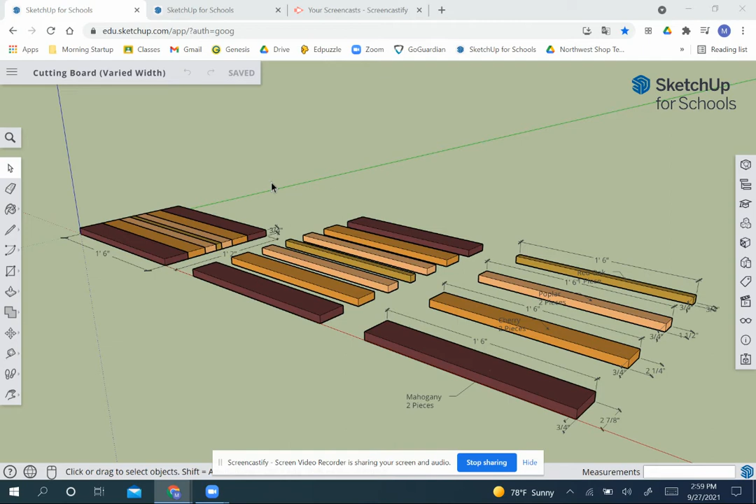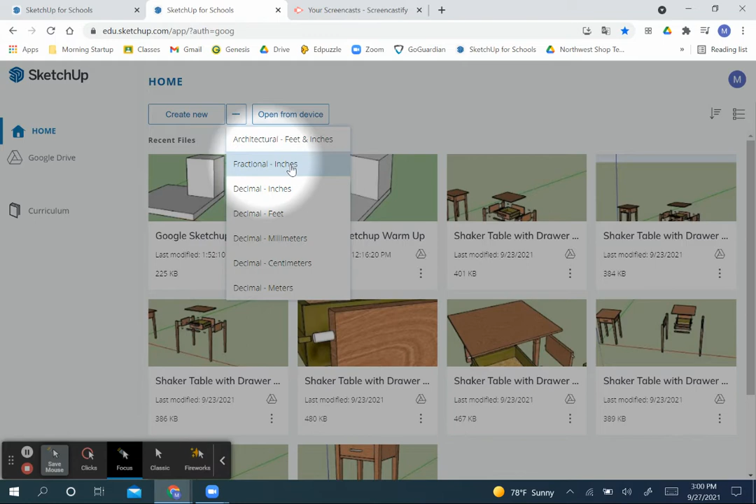Let's get started. We're going to go to the home page and focus the cursor. We'll start by going where it says create new and go to fractional inches, give it a second and it'll load your home page. You have our lady over here that you can leave or click and delete, whichever you decide. We're going to leave her here for now, just to give you an idea of scale when you start drawing.

First thing I want you to do is save your work where it says untitled. Go ahead and click, choose a folder in your drive. I'm going to go to my folder and name it Mr. Friedman Cutting Board. You can name it the same thing but with your name here - make sure you put your name and not Mr. Friedman. Then I'm going to hit save, and you should see your file name on the top left corner here.

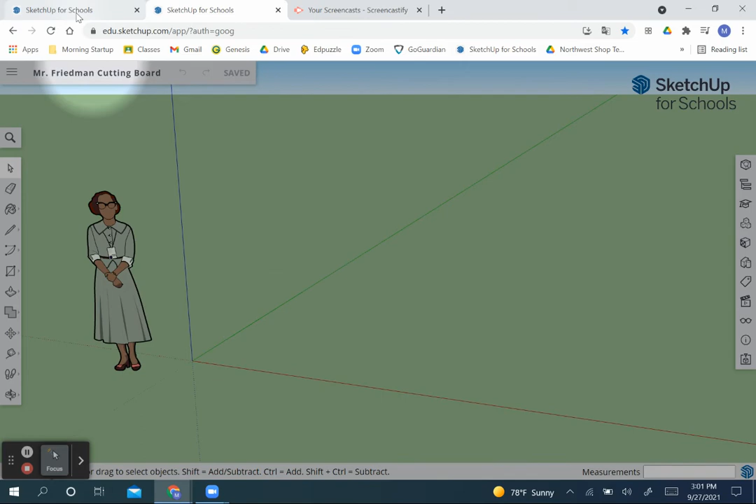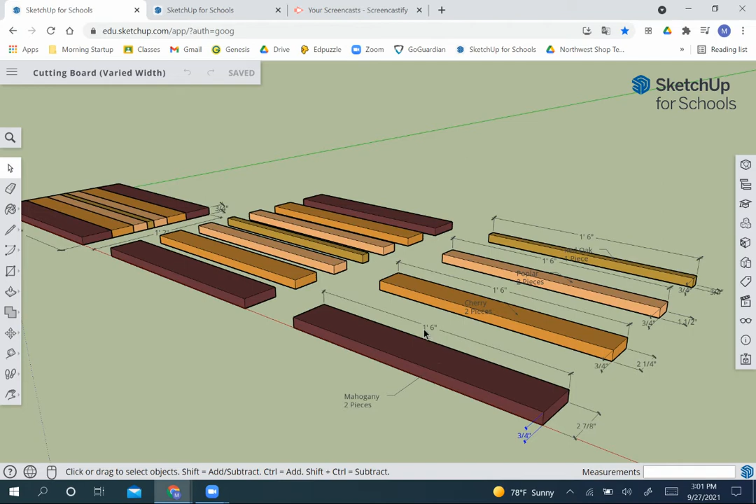Now we're going to get started, and I'll keep referencing this so you have an idea of what we're drawing first. We are going to start with drawing these individual pieces first, then copy and paste them over here and over here for our finished project. So we're going to start by drawing mahogany pieces, which are 3/4 of an inch thick, 2 7/8 wide, and 18 inches long. Let's get into it.

We're going to do R for rectangle. We're going to click, drag, and click, then do 2 space 7/8, comma 18 - you can see that down here. Now we want to make sure when we hit enter that it's going the right way. I'm going to hit enter - and of course it's going the wrong way, so I'm going to undo that and try again. If this happens, just hit the control key on your keyboard, it'll toggle between those two.

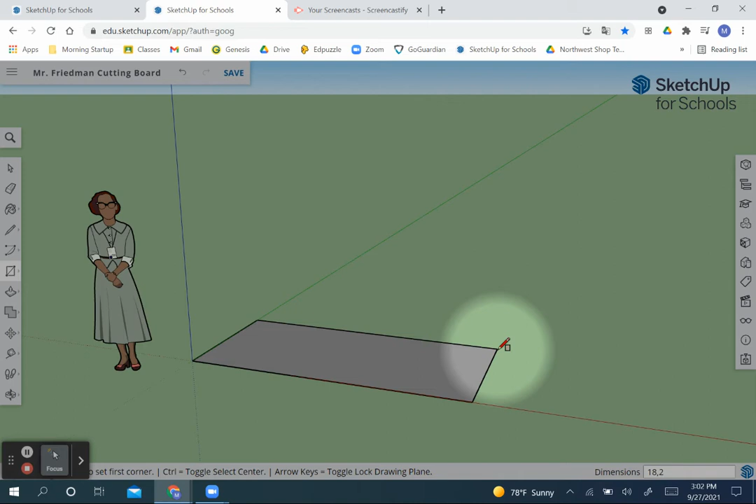Click, drag, click, and I'm going to do 18, comma, 2 space 7/8. See that down here, and I'm going to hit enter. Now we have it going in the direction that I want. So we're going to zoom into that - and so we did rectangle.

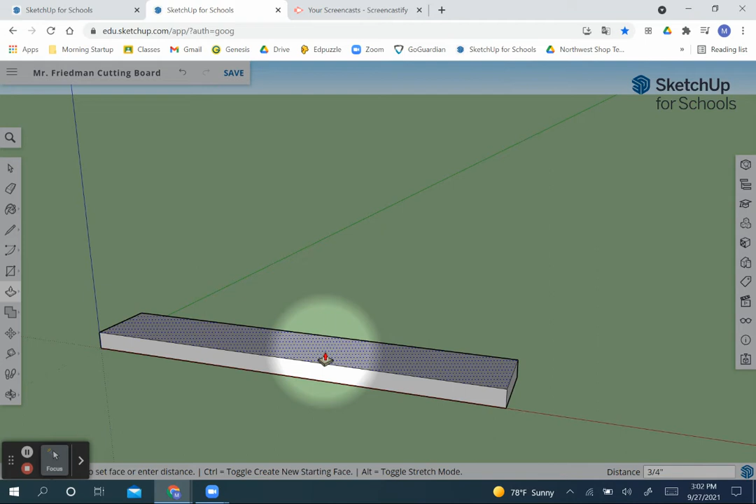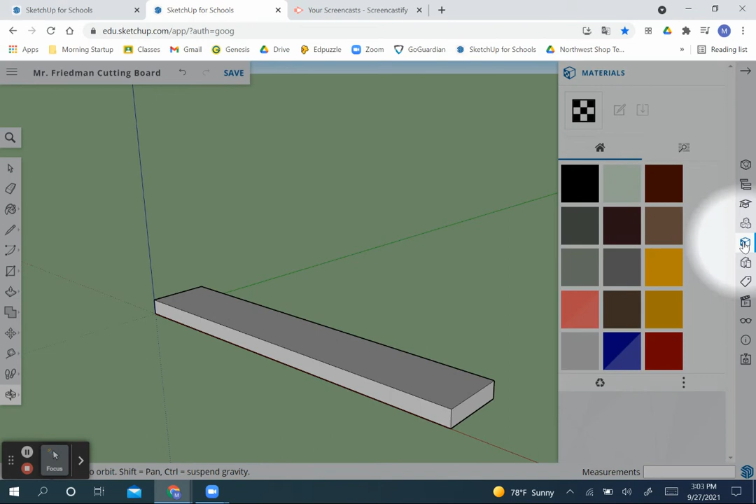Now we're going to do push, click, drag, click, and I'm going to do 3/4, enter - so it's 3/4 thick. Now I'm going to hit the space bar to go to my arrow key, and triple click, right click, make it a group. Then I'm going to color it in by coming over here to this key, and go to this color right here and color that in. So now we have our mahogany drawn.

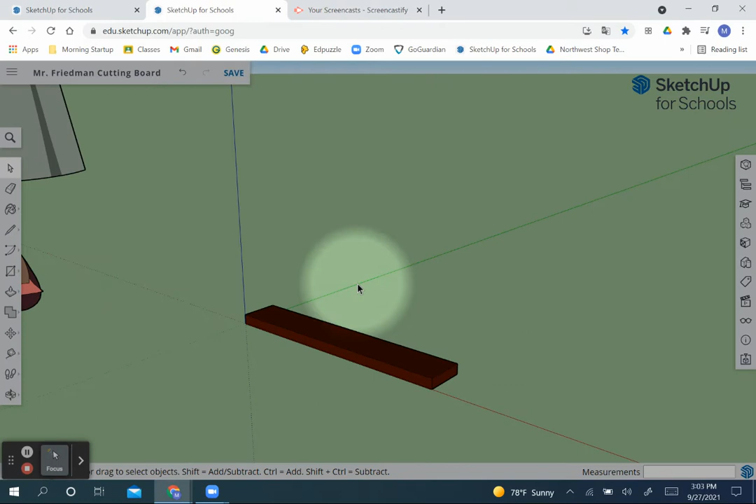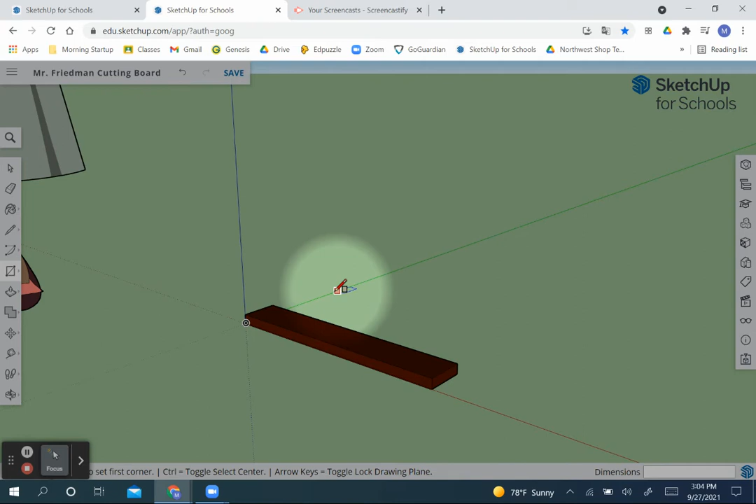Next we're going to do our cherry. Our cherry is 3/4 by 2 1/4 by 18. So now we're going to do our rectangle tool. What you want to do to keep it all lined up is drag your cursor - don't click at all, just drag it to the corner until it snaps there. Then if you bring your cursor out, you see that little dot stays on the green line. So we're going to click, drag, click - this time we know to do 18 first: 18, comma, 2 space 1/4. 18 by 2 1/4, and then I hit enter.

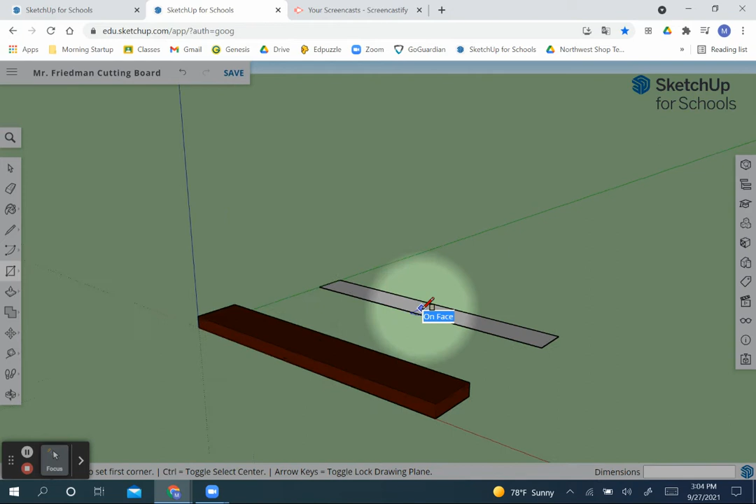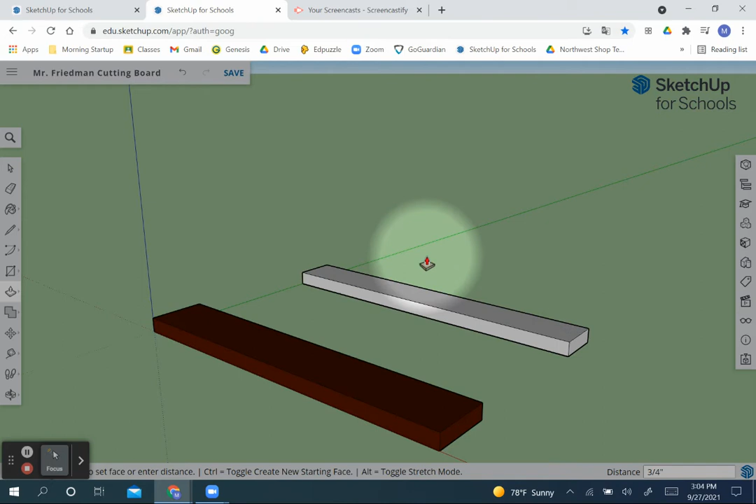Now I'm going to hit the space bar and go to my push tool with the P command on the keyboard. Click, drag, click - and you can also, if you don't want to do 3/4, type 0.75, that'll do the same thing. Enter. So there is my cherry piece, and I'm going to triple click, make it a group. I'm going to move this a little closer with my move key, M on the keyboard - just moving it down. You don't have to do this, I'm just spacing everything out on the screen.

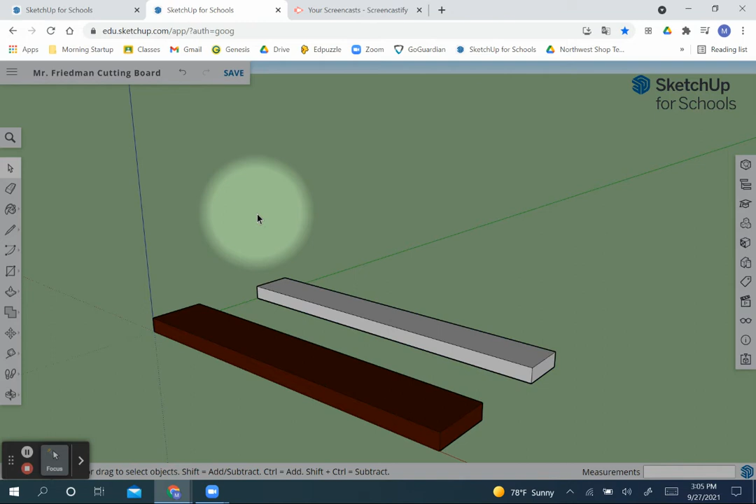Now I'm going to put the color in for the cherry, which is kind of this color here. I'm going to try and find that - looks probably over here, no, so we're going to stay over here. Something like this for our cherry.

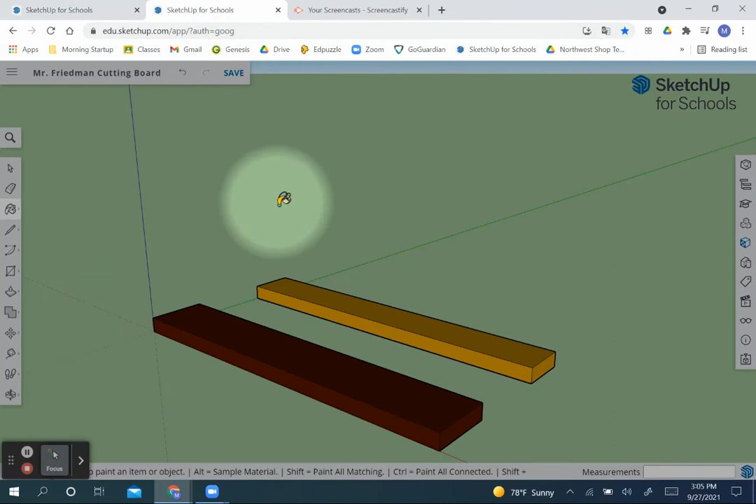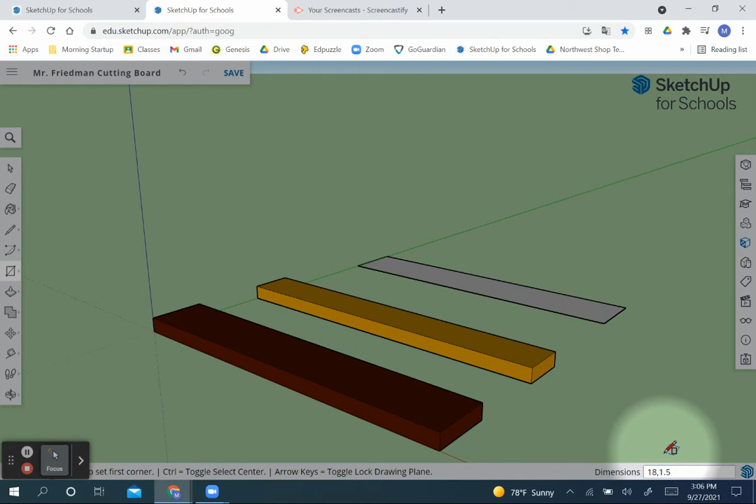Okay, now we're going to move on to drawing the poplar pieces, which are 3/4 thick, 1.5 inches wide, 18 inches long. So I'm going to do my rectangle tool, snap to the corner - don't click anything, just drag it there. Then when you bring your tool out, it's going to lock onto the green axis. I'm going to click, drag, click: 18, comma, 1.5 - if you want to do it in decimal, that's the same as 1 space 1/2. And I'm going to hit enter.

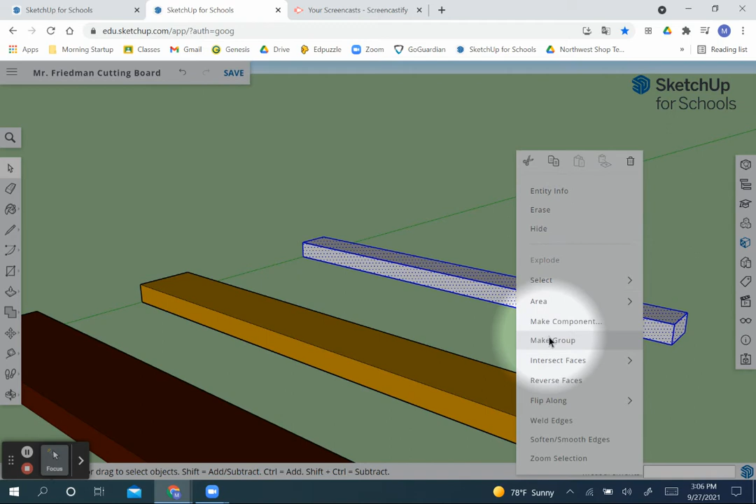Now I'm going to press the P key for push. I'm going to push this, click, drag, click, and then type 0.75, enter. Spacebar to get my arrow key, triple click, right click, make it a group. Okay, so that's my poplar.

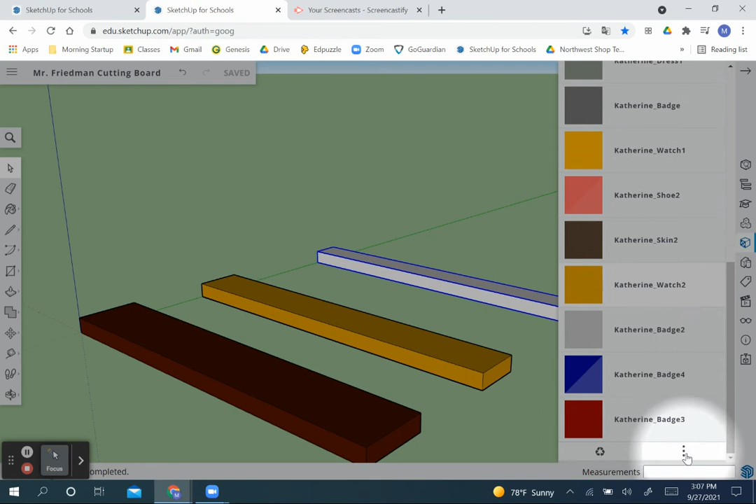Now I'm going to put the color for poplar, which is this color here. We're going to try and find that. Color's looking a little different. So not finding details. Not finding that color. If you can't find that color, you can just do something different, just so we know that it's a different piece. I'm going to go with this one here. Maybe not, I'm going to go that one. Okay, so that's our poplar.

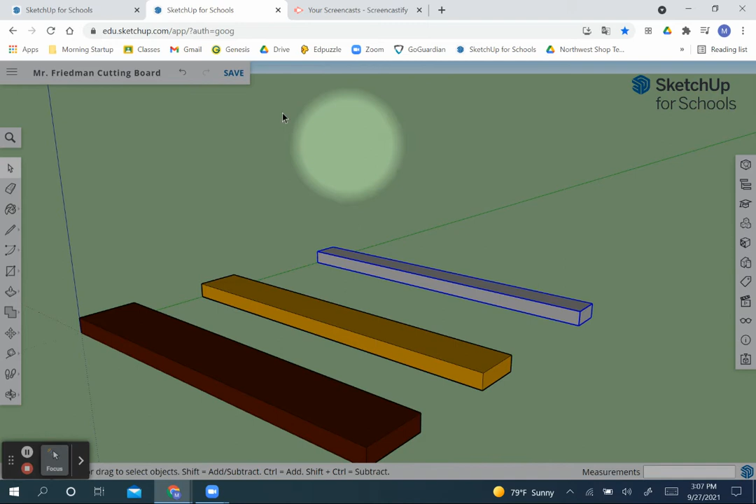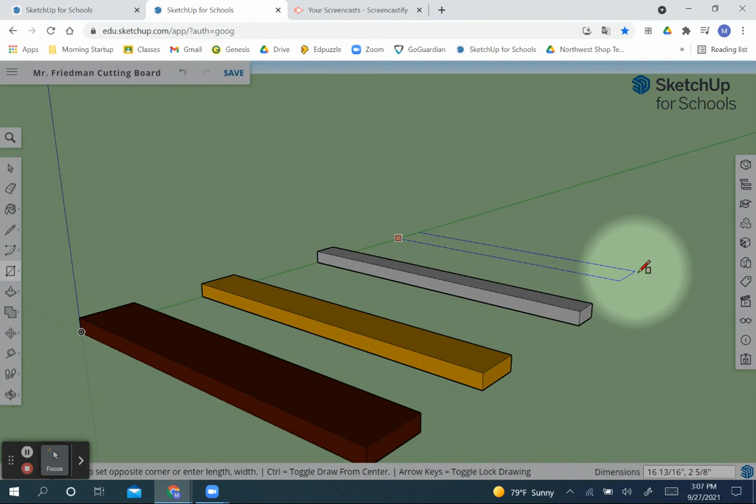And then last but not least, we're going to make our piece of oak, which is 3/4 thick, 3/4 wide, 18 inches long. So one more time: rectangle tool, snap to your corner, slide your cursor down and keep that cursor on the green axis. Click, drag, click, 18, comma, 0.75, enter. I'm going to zoom in a little bit here.

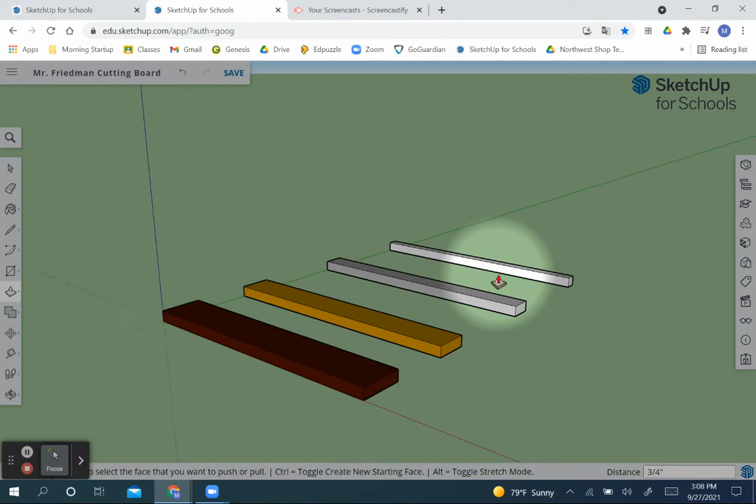I'm going to get my push tool, click, drag, click, 0.75, enter. Okay, and now I'm going to group this. So I'm going to hit the spacebar, triple click, right click, make it a group. And we're going to color this one in. We're going to go with this one here.

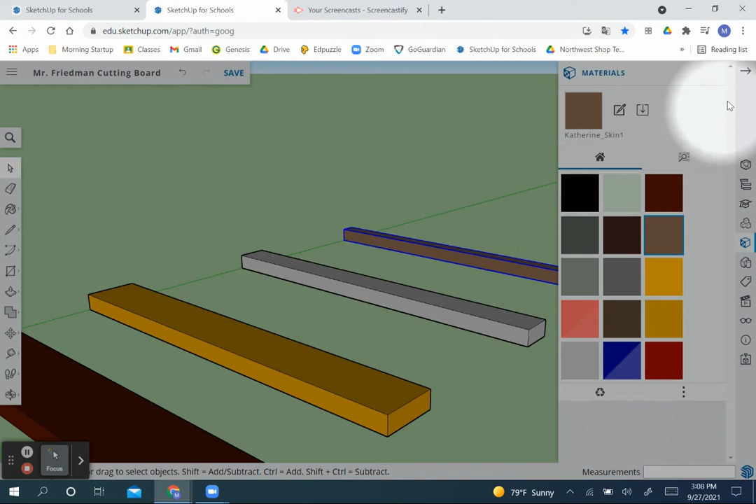Okay, so now we have all of our pieces made. So for the first section here, we're going to learn how to dimension and label them, and we're going to move them around as well. Okay, so first thing we're going to do is put some dimension lines on. Actually, no, we're going to move these over and copy them to do the second section here. We'll dimension them last.

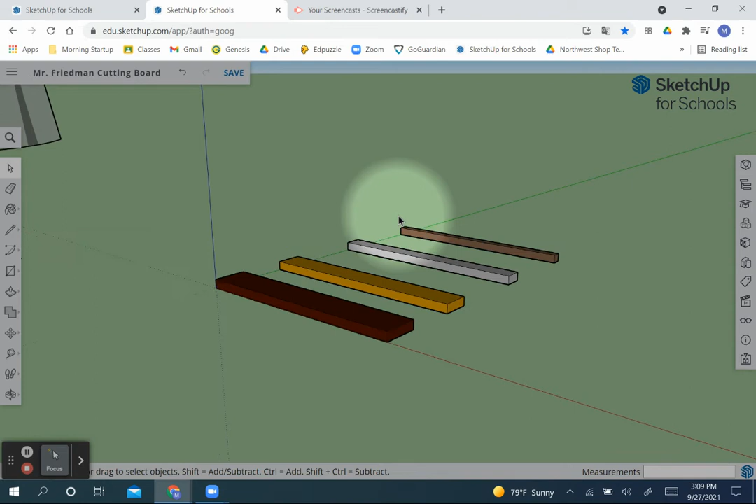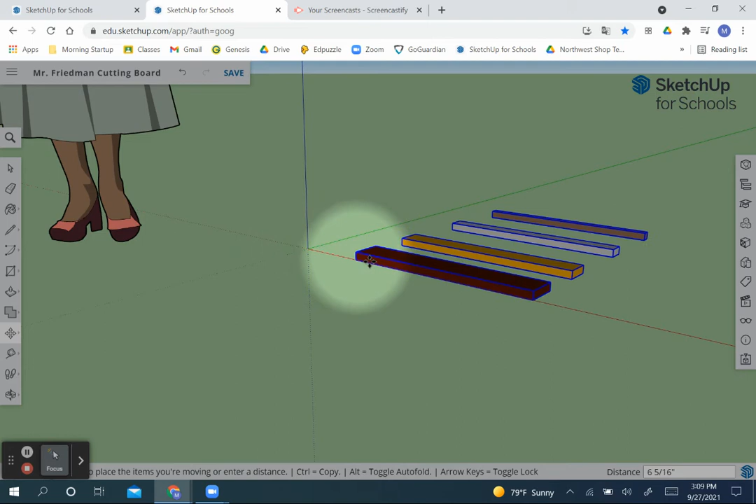So, spacebar, I'm going to click outside of here. So what I want to do is move these out of the way right now. So I'm going to start with my cursor over here, and I'm going to click and hold and drag a box across so that I can select all of these. And now I'm going to press M for move, and I'm going to click a corner once, and I'm just going to drag it, zoom out a little bit. I'm going to drag it all the way over here and click again to keep it in place. Move my camera over. Okay.

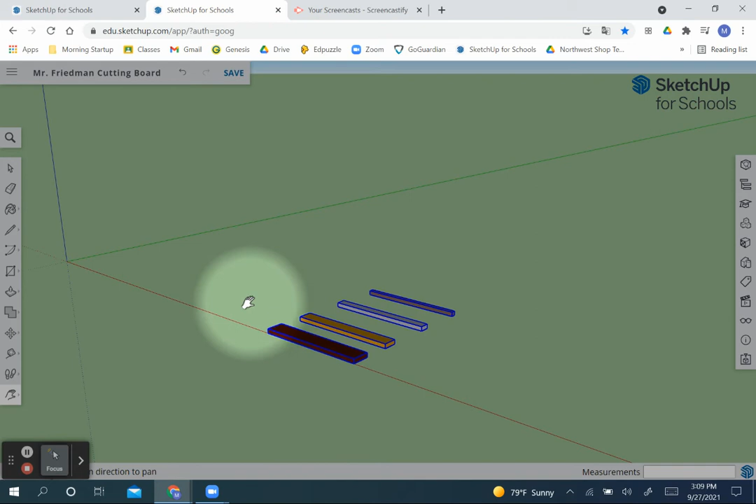Now, what I want to do next is start copying some of these pieces over to here, to this area right here, so that I can make my exploded view. Okay, so here's how we're going to do it.

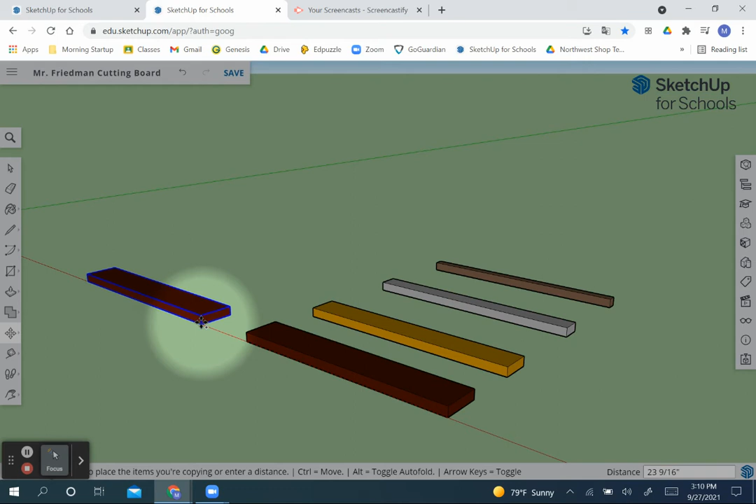We are going to start by unclicking all of them. And what I want to do is just move this one piece over. So I'm going to press M, click the corner once, and you can see when I start moving it, it's moving that one piece. But I want to copy it. So what you can do while you're in this mode is press Control once on your keyboard, and you should see a little plus sign go next to the arrows there. And you notice it made a duplicate of this piece. So I'm going to move it somewhere right around here, and I'm going to left click. Now we have a copy.

Okay, now just to go back to our sample: we have one mahogany, one cherry, one poplar, one red oak, and then it goes poplar, cherry, mahogany. So next we're going to do our cherry, then our poplar, then our red oak.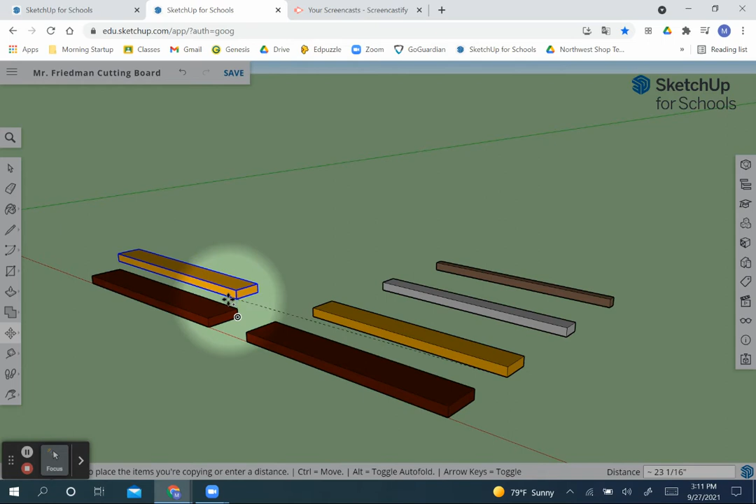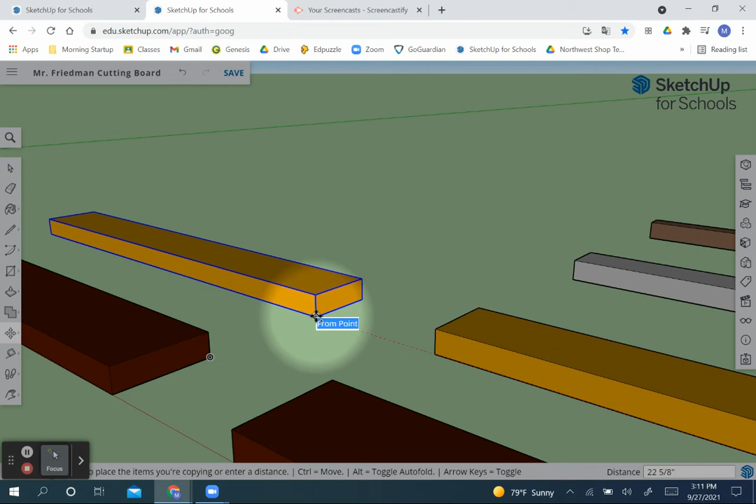So we're going to move again. I'm going to click this corner here, and it's moving that one, so I'm going to hit Control. And now what I want to do here is I want to line it up to this piece also. I want it to be lined up in the same spot as this. So as you're moving it over, you should see a red line. You want to keep it on the red axis, and we want it to snap to this corner. So if I move it near here, it's going to snap to the end point in group, is what it's going to say. So once I have it snapped to there, I can drag it back over until it snaps to both — right there, you can see both of the dotted lines are highlighted. Now I'm going to left click. Okay, so I have that moved over.

And so now I want to move a piece of poplar over, the next smallest piece. So I'm going to pan over to here. I'm going to get my move tool, click, drag — and it's moving the same one, so I'm going to hit Control so that it duplicates it. So I'm going to move it down. I'm going to move it over here until it snaps, and then drag it until both of them snap, and click.

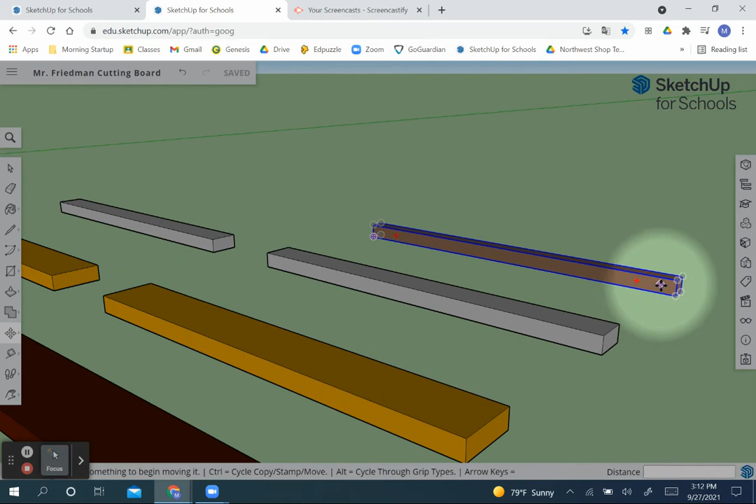Now I'm going to do the smallest piece, our piece of oak. Click, drag, hit Control so it copies, snap, move it over till they both snap. Okay, and now I have both of them copied over.

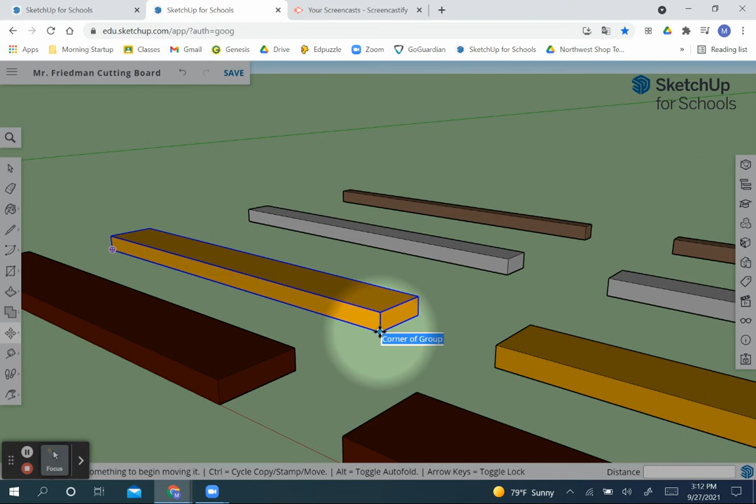Since these are spaced out really far apart right now, I want to move them a little closer. So first I'm going to move them all together like this. And just to make our lives easier, now we're going to do the reverse pattern, put these all in place, and then space them apart again.

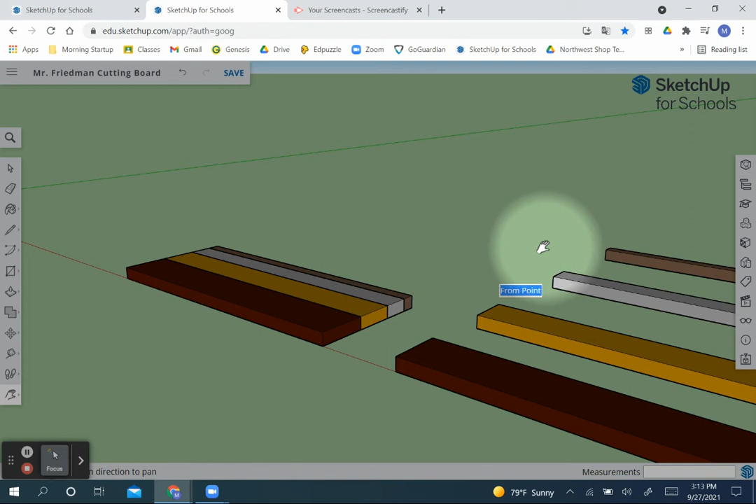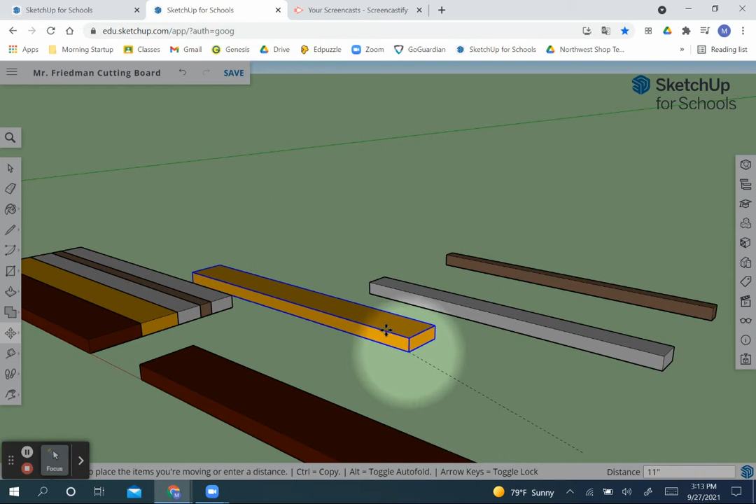So I'm going to take a piece of poplar and move that over, copy it with Control. It's going to go over here, and then we're going to take our cherry, move that over, Control to copy, move that over here. Last but not least, we're going to finish off with our piece of mahogany. Click, drag, Control to copy, and click it into place there.

So now we've made the copy, and we have our cutting board, but this needs to be an exploded view. So what we want to do is move all of these and separate them again, and I want them to be 2 inches apart each. Here's how we're going to do that.

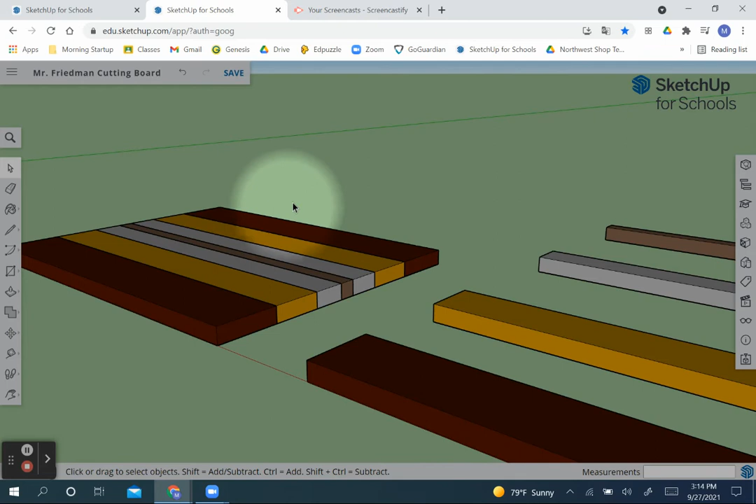I'm going to hit the space bar to get back to my cursor and unselect anything that you had selected. I want to only highlight and select this piece, this, this, and this. I can click out here and drag until the box only goes to right here, not over to here. So just those are highlighted right now.

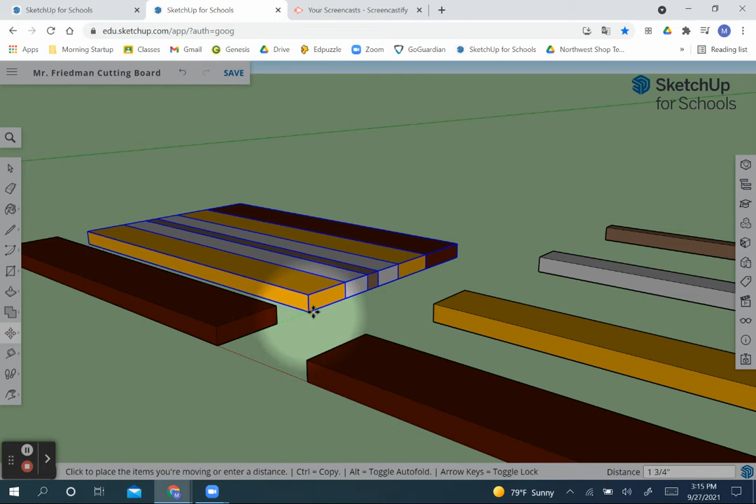Now I'm going to hit M for move. I'm going to go to this corner here, and click, drag so that you see the green axis. Click, drag, click, and then I'm going to type 2 and enter. Okay, so now they're 2 inches apart.

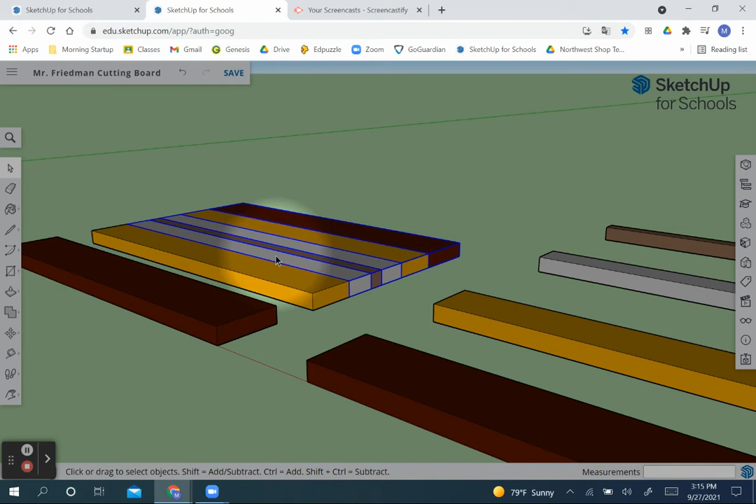Spacebar, click so that they're not all highlighted, and then I'm going to highlight just up until this one here. M for move, click, drag, click, 2 inches, enter, and we're going to repeat the process for all of them. So I'll click outside here, click, drag, click. Now that you see the pattern, I'm going to move a little faster.

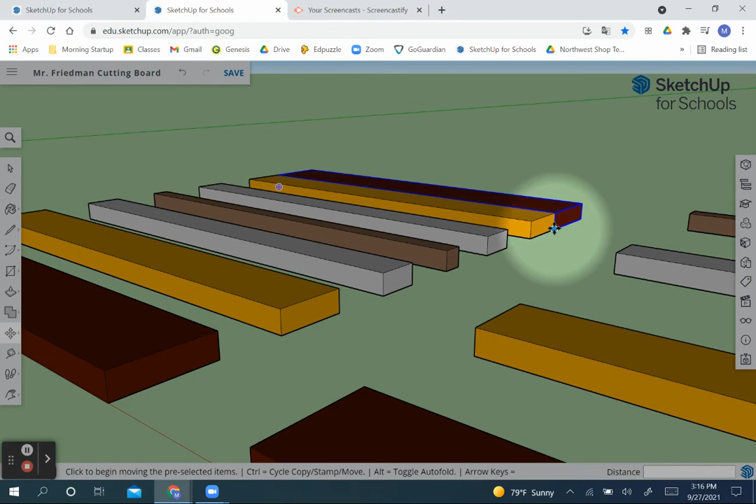This is going to make it so they're all spaced out equally. Click, drag, click, 2 inches. We just have a few more left to do. Click, drag, click, 2 inches. Last but not least, select just this one, and click, drag, click, 2 inches.

So then we end up with all of the pieces equally spaced, like so. Now, what we want to do at this point is make our actual cutting board. If we go back over to here, we want to make our cutting board over here in this corner.

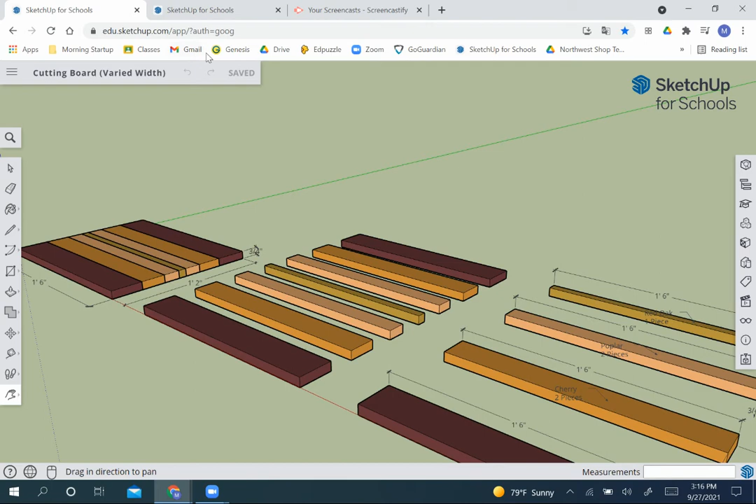So what we're going to do is copy these pieces over and then just put those back together. We're going to highlight all of these pieces. I'm going to zoom out a little bit and reposition my camera, my view. And I'm going to hit M for move.

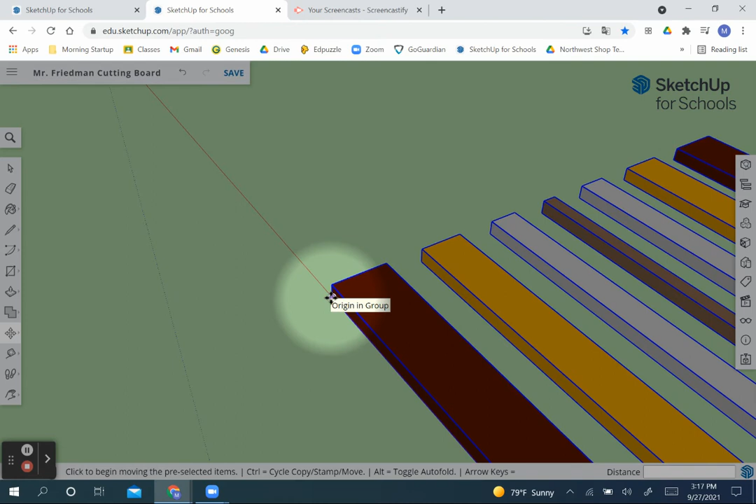And I want to find this corner right here. And I'm going to click. As I drag, it's moving that object. So I want to copy them all. I'm going to hit Control. Now I have a copy of all of those.

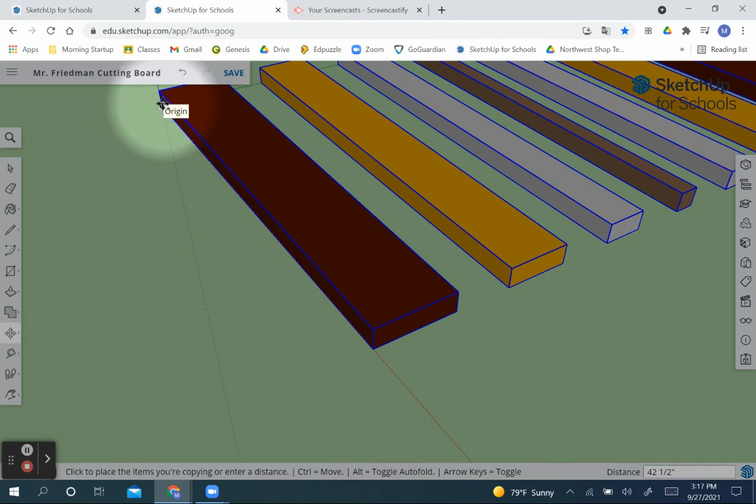And I want to take this to the corner where the red, green, and blue axes meet. So I'm going to go to that corner and click it in place. Let me reposition my camera like so. Okay, so you should have that copied over to here, like that.

And now we're going to put these back together. So it'll just be a matter of doing what we just did before, highlighting all of these, moving them back in place, kind of the reverse of what we just did. So highlight each one, use your move tool, and we're just putting the pieces back together. This is how we're going to glue them up, right in this order.

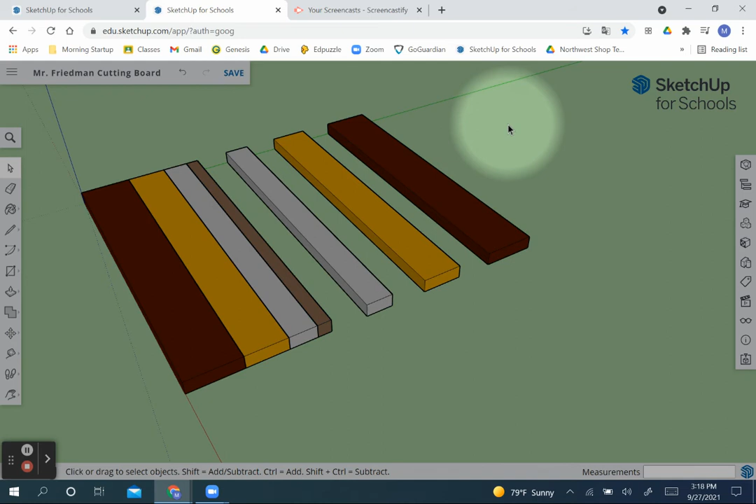Highlight, highlight each one, use your move key until everything is put back together. Okay.

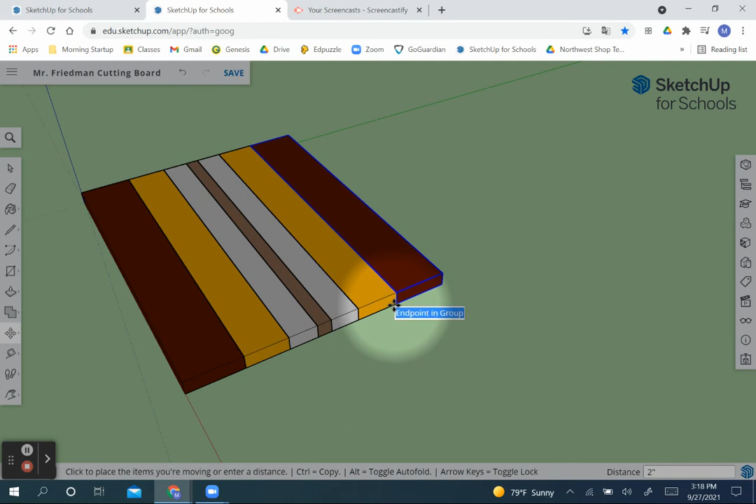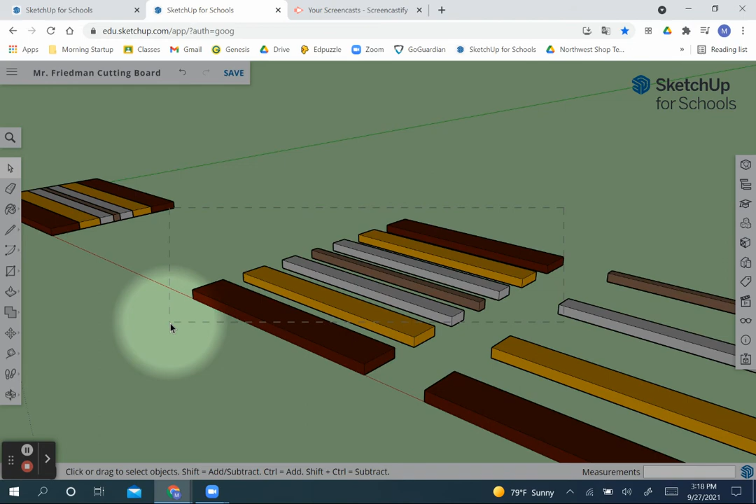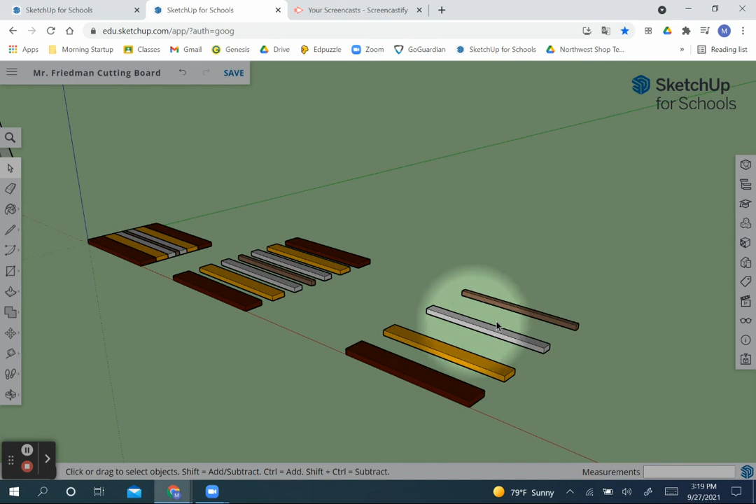All right, so there is our finished cutting board. Now we're just going to tidy some of this up a little bit. Here's how we're going to do that. We're going to move these pieces over just a little bit closer. I'm going to highlight all of this. Whoops, didn't want to highlight that—let me come back over here and make sure I'm only capturing the pieces. I'm just going to move that a little bit closer, like that. And we're going to do the same for these, move them a little bit closer, like that. Now everything's nice and neat.

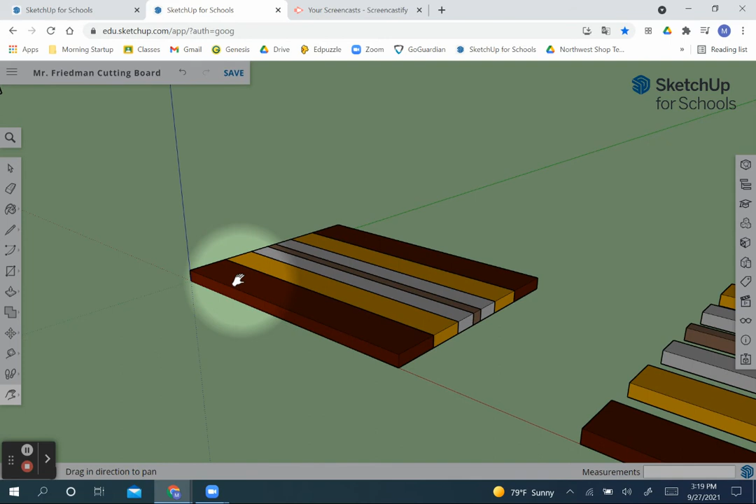So the last thing we're going to do is dimension and label everything. We'll start with our main cutting board. The way we do the dimensioning is over here on the left side where the tape measure is—click that, then go to this icon here, that's for dimensions, and you see the little tape measure appear. We're going to do our thickness out here. The way you do that is click, let go, drag, click to the top, and then once you click the second time...

Click, drag, click. Sorry, let's start over—I'm going to hit escape, undo that, let's try this again. So click, drag, click, and then drag your cursor out either direction. We're going to go this way, so it shows 3/4.

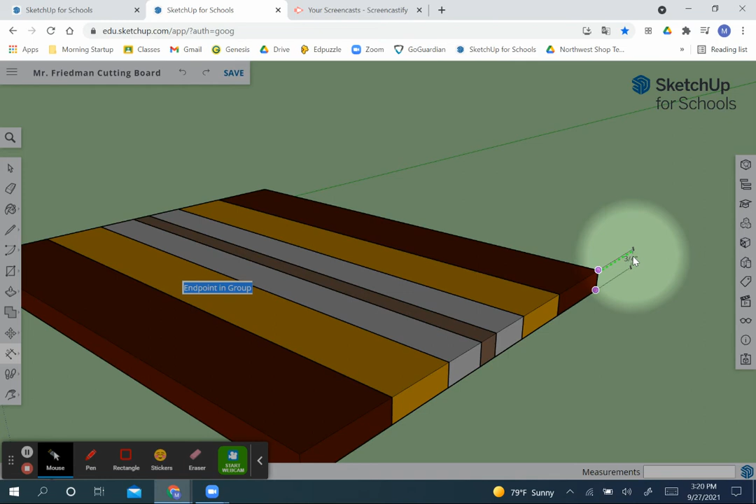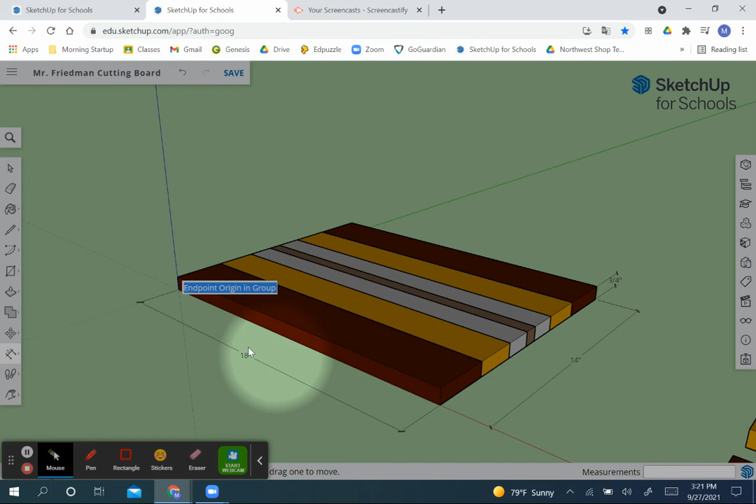Okay, that's our thickness. Now we're going to do our width: click, drag, click, drag it out, and we have 14 inches, which is what we want. Then click, drag, click—whoops, hang on, do it that way. Click, drag, click, and then I'm going to bring it out like this. So I have 18 long, 14 wide, 3/4 thick. That's the overall size of the cutting board.

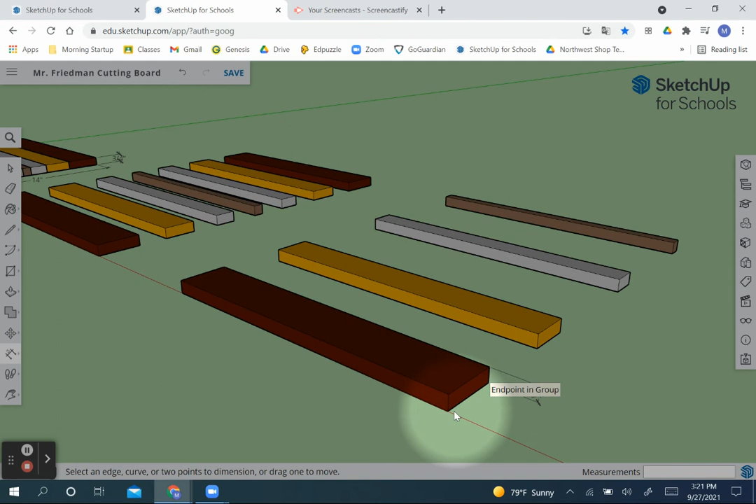We're going to leave our exploded view alone, and then pan over to each individual piece here to dimension those. I'm going to go back to my tape measure, go to the dimension tool, get this out of here, and we're going to click, drag, click, and extend that out this way. That's our thickness. Click, drag, click, bring that out this way for our width, and then click, drag, click, and bring that out for our length.

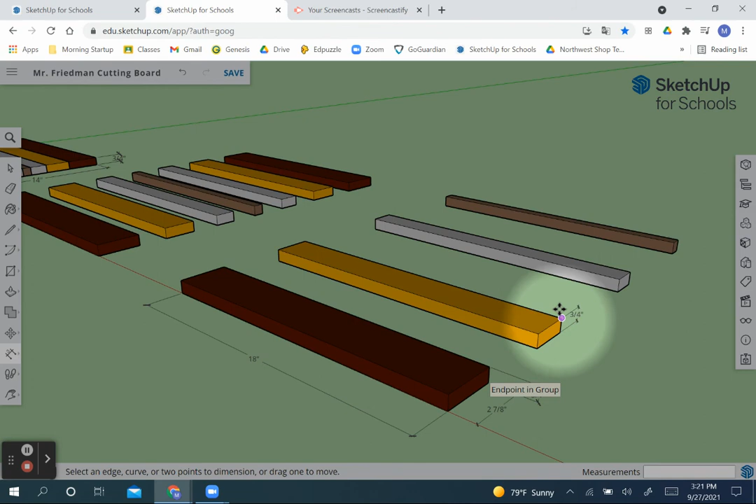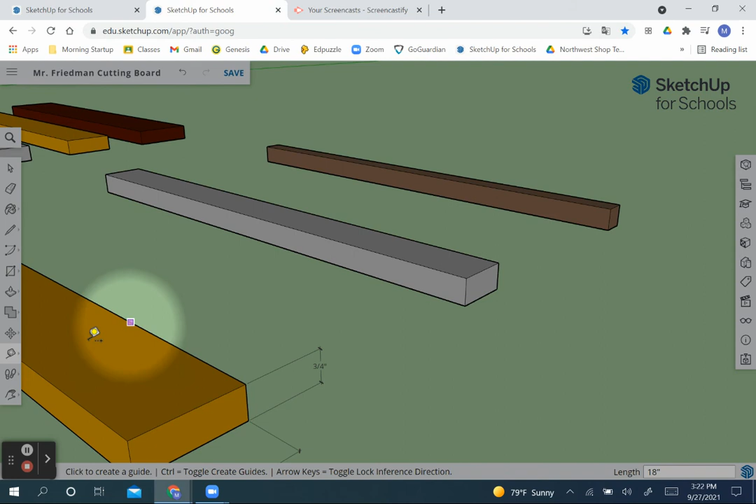I'm just going to quickly do the same thing for each one of these. What I'm going to do differently is bring it out this way instead of this way because this looks a little crowded here. I like them going in separate directions so it doesn't get confusing. Just drag, click, drag it out, click it again. Let's reposition our camera. Okay, back to our dimension tool, and we're just going to repeat the same exact process, getting every single piece dimensioned, and finish off with our oak piece, so we know what size every single thing is supposed to be.

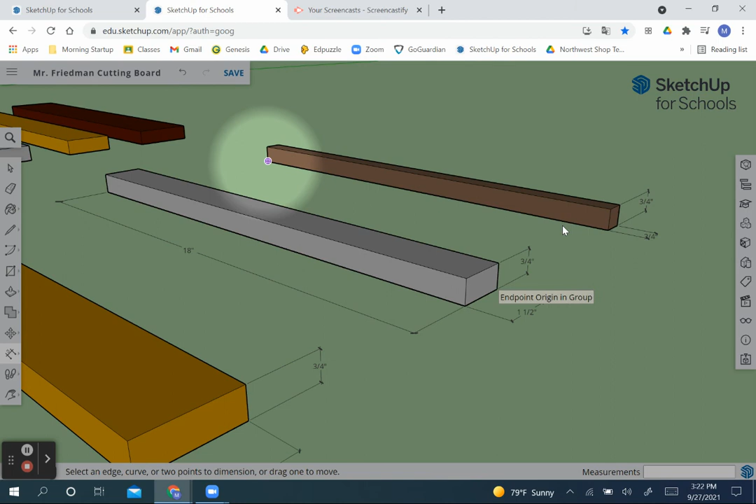Alright, now that that is done, last but not least we are going to label what each piece is and how many of them we need. Here's how we do that: same area where the tape measure and dimensioning icons were, we're going to go to this one where it says text. What you can do here is click once on the surface, drag maybe somewhere out here where it's readable, and then click again, and you have a text box there. So we're going to delete that.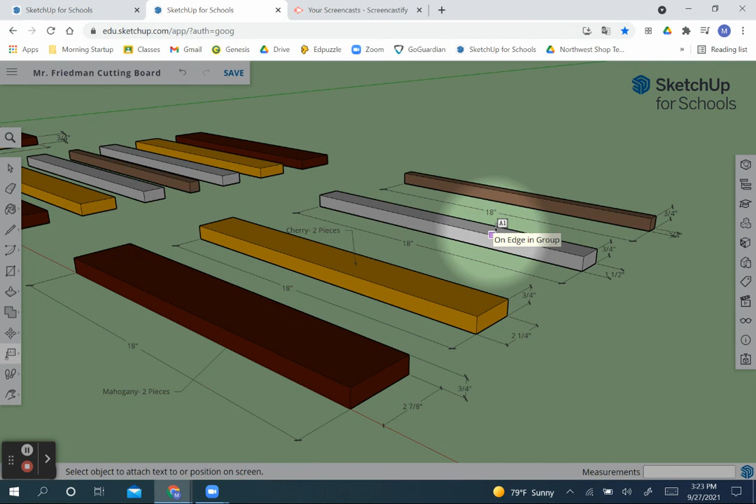We're going to label this mahogany, and we are going to say how many pieces we need—2 pieces. Not enter, just click outside of it, and then it'll show up right there. We're going to go click, drag, click over to here, delete that, and write cherry. And we need 2 pieces of cherry. Click outside of that, then click on the surface here.

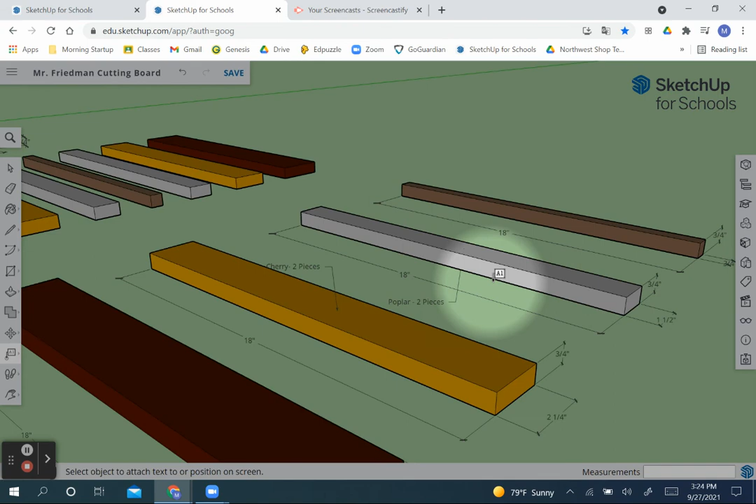Zoom in a little bit. Click, drag, click to here. We're going to say poplar, and we need 2 pieces of poplar. And then last but not least, our oak out here. Click, drag, click. This is red oak, and we need one piece.

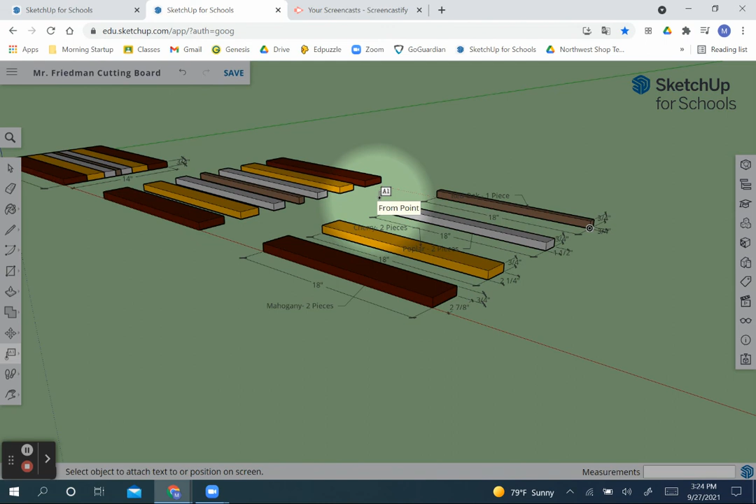Okay, all right, so now that we have everything labeled, you should have your drawing looking something just like this. Maybe the colors will be a little different if you have different colors in your SketchUp than what I had, but okay. So what I want to see for your screenshot is a screenshot like this that shows all three of the drawings. That can be one screenshot.

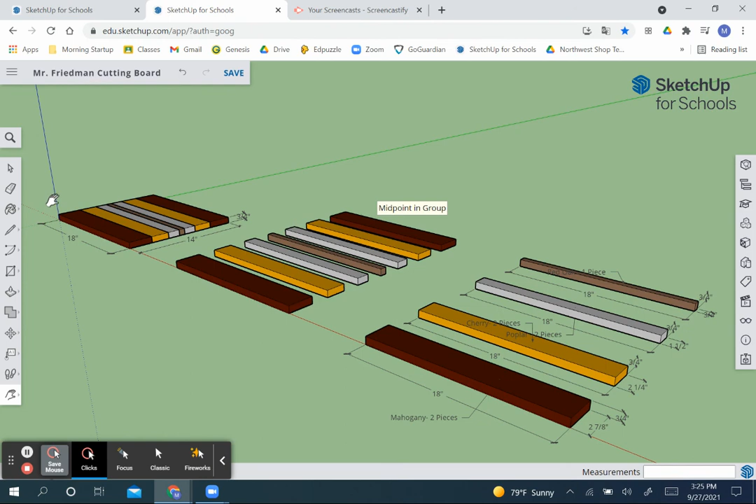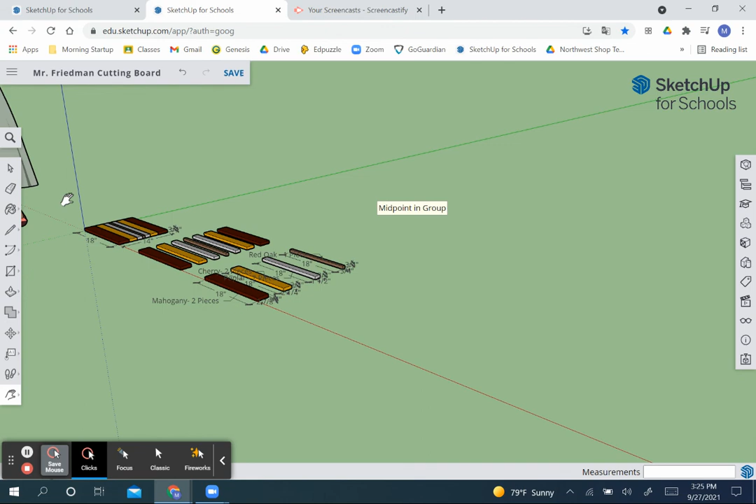Make sure I can see the name of the file up on the top left-hand corner in your screenshot—that can be your first screenshot. The second one, I want it zoomed in on just this section here with all of the dimensions, so I can check and make sure you drew everything to the proper size. The third screenshot can be our final cutting board drawing that looks just like this, where I can see the final dimensions: 3/4 thick, 14 wide, 18 inches long.

All right, so that is our cutting board.